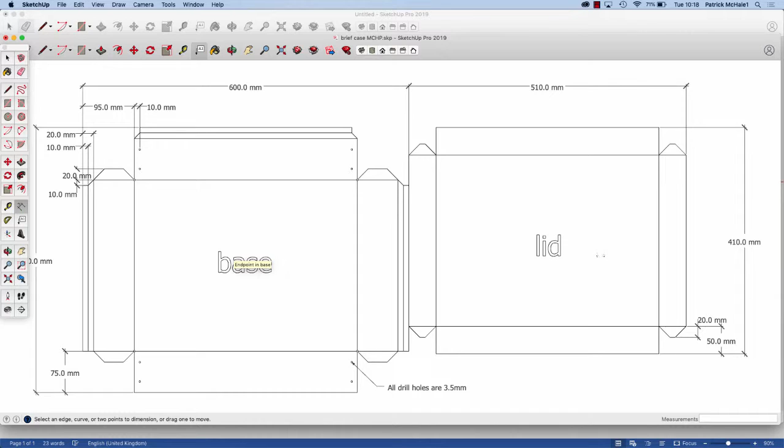Year 12s and year 11s, how do we get our work looking like this in Word? From our SketchUp drawing, your work will look something like this. You mightn't be up to that stage yet, so I'm going to show you how to get your SketchUp drawing looking like this and getting it into Word.

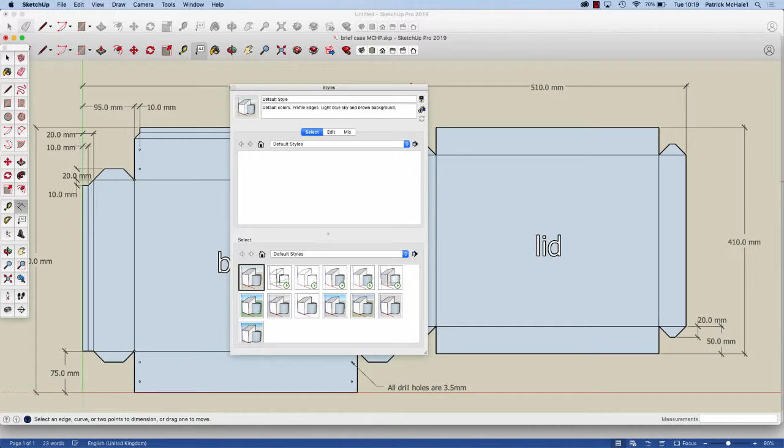You've got a working drawing you can bring into the workshop with a title block down at the bottom. This process can be used for any design task in relation to laying out your work for the workshop. So if we look over here, in SketchUp, your drawing probably looks something like window and styles - let's see, it looks like this maybe. And you could be at a funny angle, and you may not have dimensions.

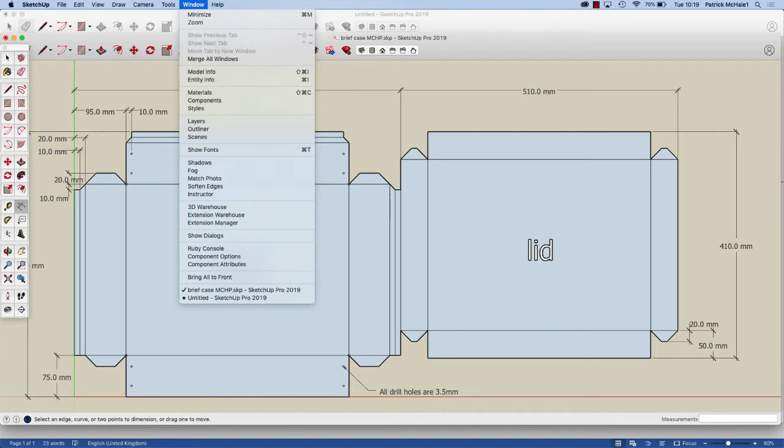I'm going to show you how to get to this point, the point I had at the start of the video. First up, we want to click on the top view. Next up, we want to go to window and styles, and we're going to get our lovely white background.

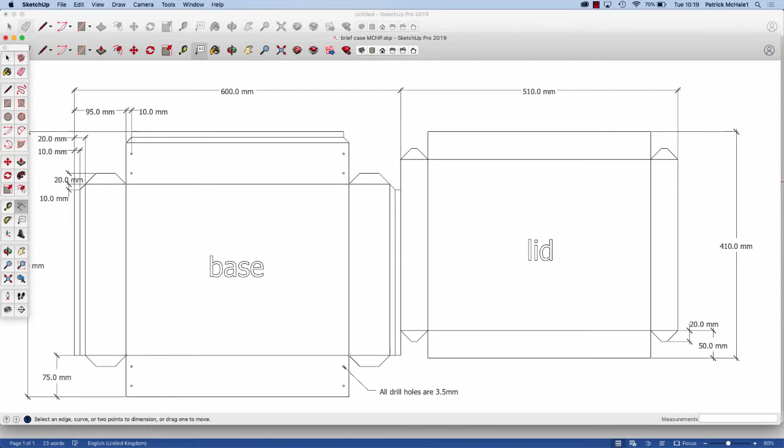However, at this stage, you can still see the X and Y axis here. So what we want to do is go view and untick everything here - guides, axes, and section cuts. So you shouldn't see any guidelines on there. You guys can do that yourselves.

I'm going to zoom in so I cover the entire page in SketchUp with all of my work there. Now, with the large tool set on the side, remember view, tool palettes, large tool set. I'm going to click on the dimension tool here, and I'm going to start dimensioning my work.

Now you can see I have my dimensions in already. I'll just delete a few - I'll delete this one, and this one, and I'll redo those dimensions so you can see. Every other dimension works off the same principle as what I'm about to do.

So, dimension tool. Remember, what you're trying to do is put in dimensions here that are going to help you in the workshop. So everything you need to scribe out, or use your odd leg calipers for, in the workshop, you need to have those dimensions on here. I'm going to click on that point, click on this point, and beware of the sideways measurement like this - you don't want that. You want to have your dimensions going vertical or horizontal.

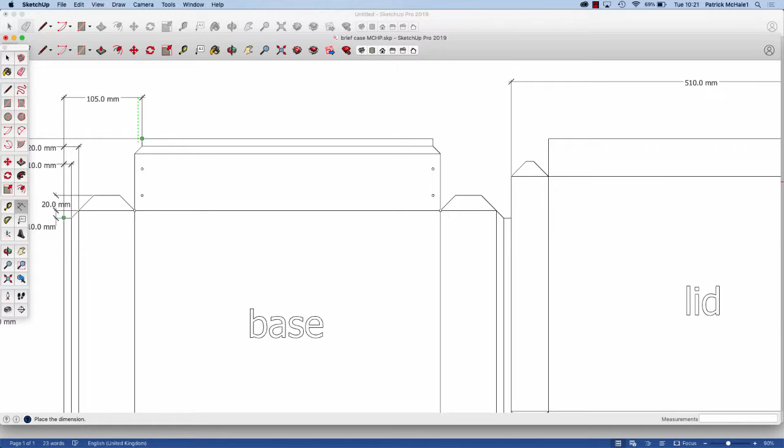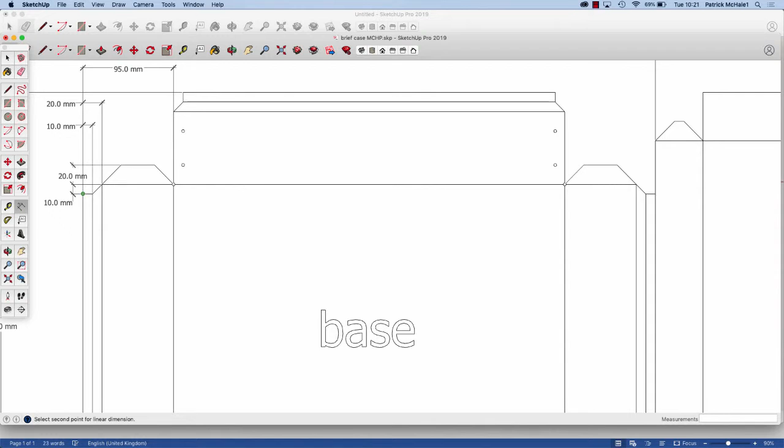Now in this case, I'll escape that because I want that dimension to be from here to here. I'll go straight up, and that's 95. Now I had a measurement of 600 going all the way across, so I click from here, and this matches the edge of my material over here, and I'll just move that up.

Now I'm actually on the dimension tool right now. See how I line these up? For some reason it's showing the eraser, but that's a bit silly - it should be dimension. I'll click zoom extents again to zoom in. So I have most of the measurements I want. There was a little 10mm measurement from here to here. Remember, you move straight up.

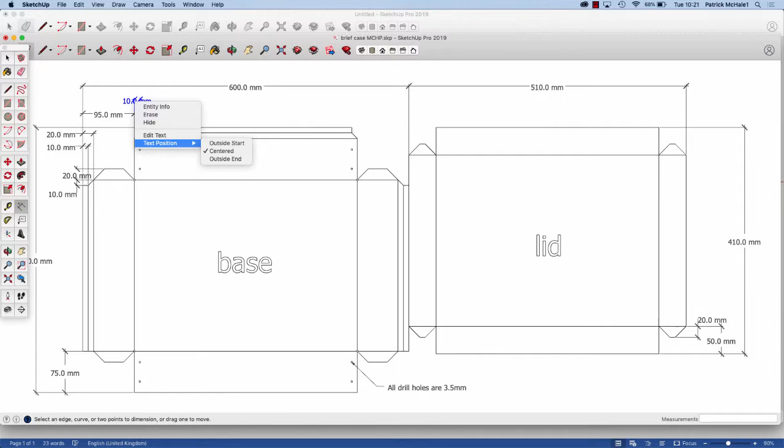Now this is the trick. What you want to do is right click on your measurement, text position, and outside start or outside end will clean up your measurement. Next up, what we want to do is move around your measurements. If you hit the M on the keyboard for the move tool, you can move around your measurements and make them look all nice and neat and tidy.

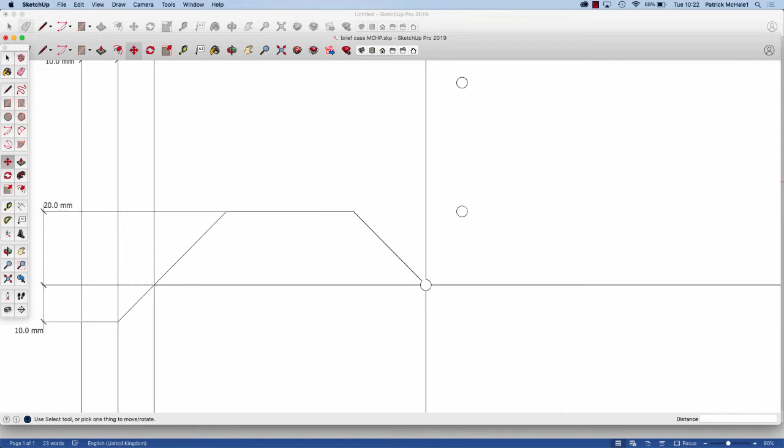For example, this one here, 20, doesn't look very good, so I'll text position, outside start. Not bad. I could move it to the side to make it a bit clearer, using the move tool. I'll zoom in so it's easier to select, and I'll move out here. As you can see, when you zoom in and zoom out, you kind of want to be zoomed out this far so you can see what your end result will look like.

So now that's much better. Easy. So we go around and we dimension all our drawing, and any notes we want to put in, like this note down here - I've clicked on the hole and I've clicked over here and I've typed in all drill holes are 3.5mm. No need to dimension every drill hole because that's repetition.

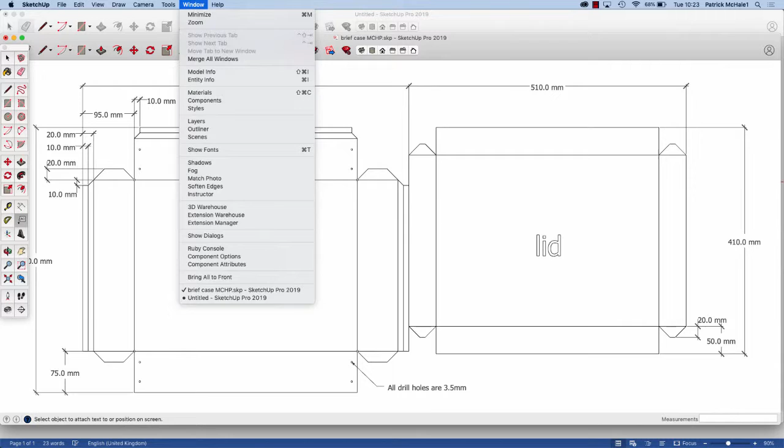Now next up, I want to get this into a Word document, so I'm going to go File. Make sure everything's perfect before you go to this next step. Probably the final step again is click zoom extents so it gets everything on the page. File, export, 2D graphic. I'm going to export a 2D graphic, briefcase, export onto my desktop, and I will open up my Word document. Now, this is how you want your Word document to look.

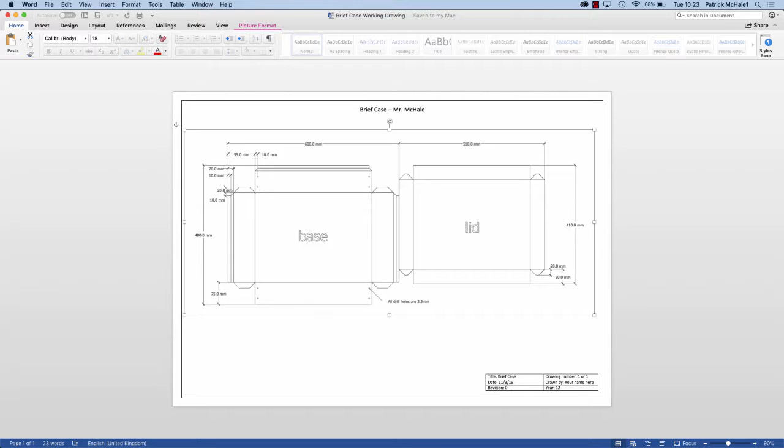I'll open up a new document here, File, New Document. In this case, we're going A3 - this is mainly for upper schools, A3. Often in lower school, we're using A4. So I'll just change the size in this case to A3, change our orientation to landscape, and change our margins to narrow margins.

And we'll go into design, page borders, just put a little box around the page. Okay, that's that much done. Remember, this is what we're aiming for over here.

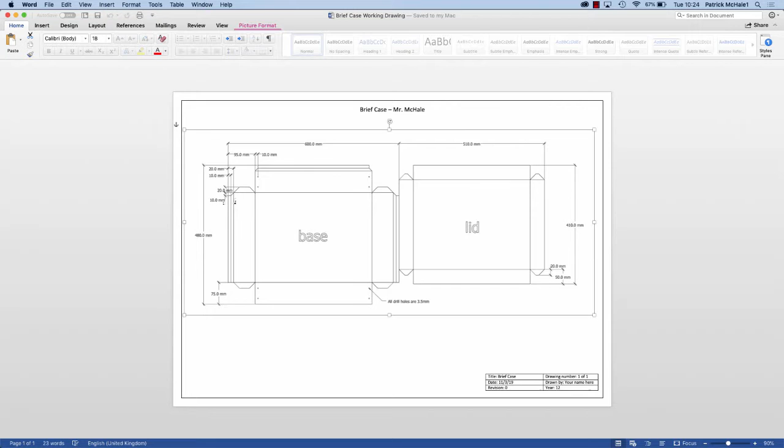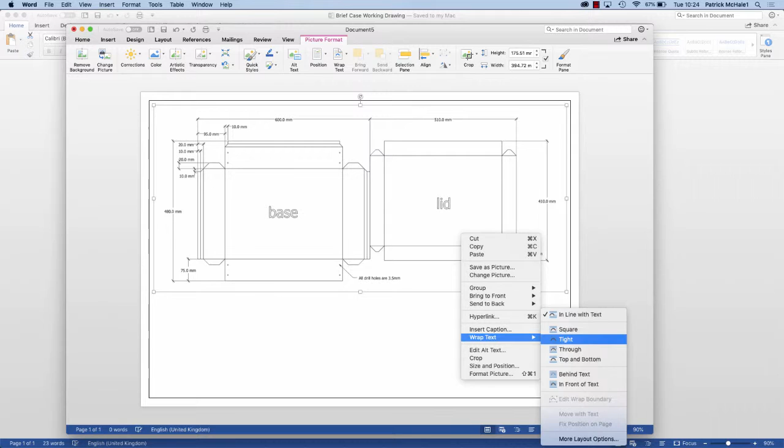And what I want to do is insert the picture. So it's on my desktop, picture from file, and make sure you name your files when you're exporting, just so it's easy to find. Now, first thing you want to do is wrap text and tight, so you can move this into whatever position you want.

On my other drawing, you can see you will need to put a title on the top. I'll let you guys do that yourself. And this is the most important thing down the bottom. I'm going to zoom in here so you can see the table. You need to put a little table down in the corner of your drawing that says the following things. I'm not going to do the table - I'll let you guys do that yourselves.

It's just insert table, and this is a 3x2 table - 3 rows, 2 columns. You need title of your drawing, date, revision - 0 is the first one, meaning it hasn't been revised yet - and drawing number 1 of 1, drawn by your name here, and your year group down the bottom.

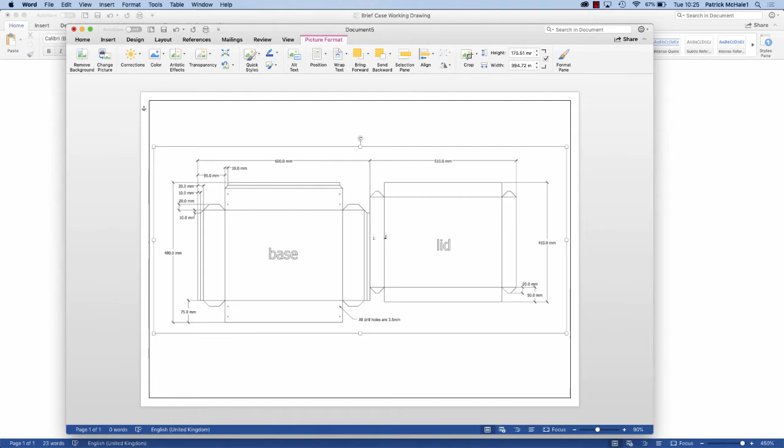Okay, so zoom out. Actually, just go back to my other drawing. Here we go. Okay, and what you should end up with is a drawing that looks like this. And that's how you lay out your SketchUp drawing in Microsoft Word.